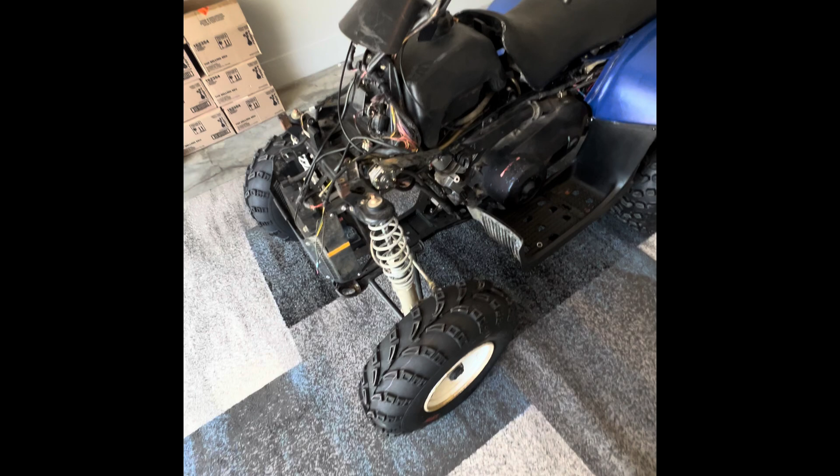One of my old good friends from a Honda dealership. I worked with him for a long time. He was our parts guy. He had this machine. He's been trying to fix it. He told me that he doesn't think it has spark, or it's an intermittent spark issue. I know it's not a real common machine anymore. It was a really common machine, but I know there's not a whole lot of them left out there because it's older and most of them are probably in the junkyard. But the same basic steps that we take here can be used on many things.

First of all, I'm rocking some Bill Murray. His new album drops later today. Pretty pumped about that. So in honor of him and cranking the hog, we're gonna rock that while we work on this.

First thing I'm gonna do, hook up a battery maintainer. I actually personally really enjoy electrical issues. I know a lot of people hate them, absolutely despise them, but it's one of my favorite things. As you can see, the battery is showing that it's charging, but I highly doubt we get anything out of it. I might get the voltage meter and take a reading on it just to see what it's saying.

All right, I'm just using a cheap voltmeter, nothing fancy here. Disconnected the battery charger, hooked up to the battery, and you can see we're showing 12.25 DC volts, which is not great. That's not gonna be enough to start anything. We should be up around 12.8-ish. I'm gonna go ahead and hook the battery charger back up to it and let it do its thing. With the battery maintainer hooked up, checking the voltage, you can see it's rising. It is charging right now.

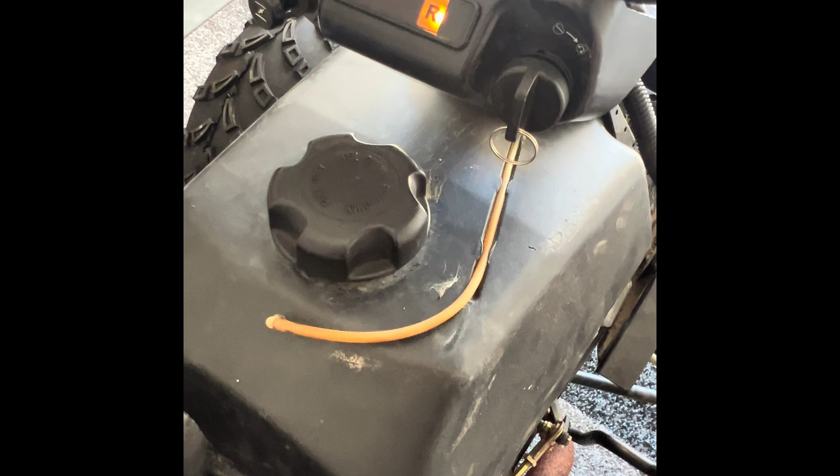One thing I'm noticing right off the bat, we have no dash lights in neutral. The indicator shows up for reverse, and then kind of partially in between reverse and neutral. Not that's neutral there, kind of partially in between, you get a neutral light. That could be some of our problems. The gear selection switch may not be letting it spark because it doesn't think we're in neutral.

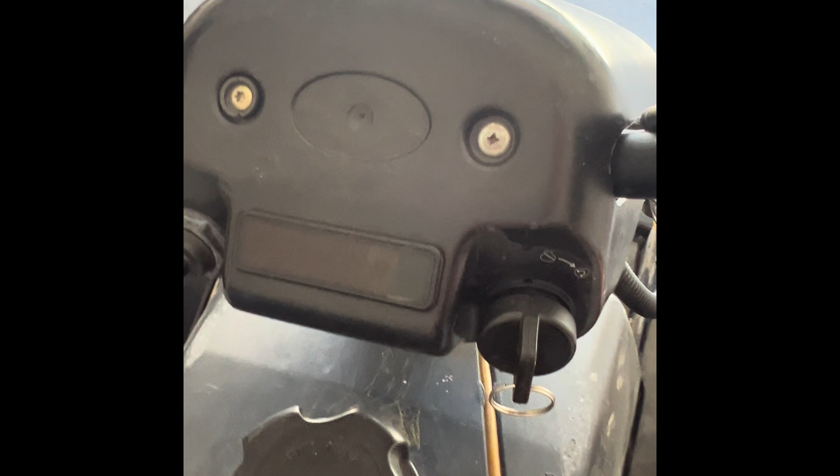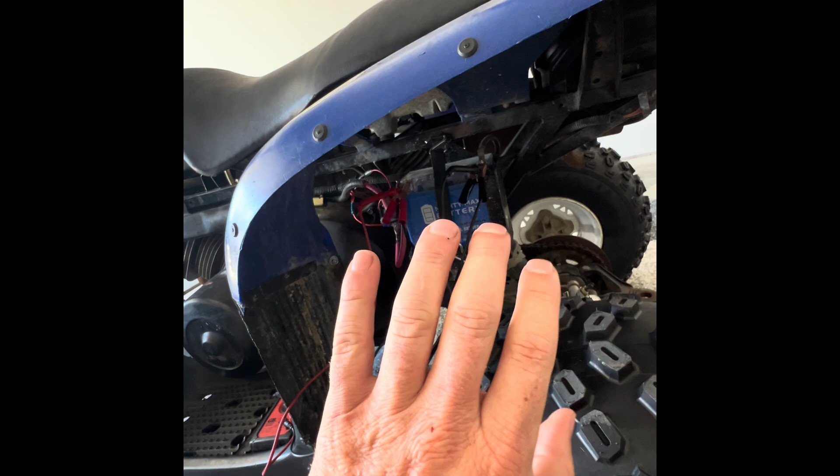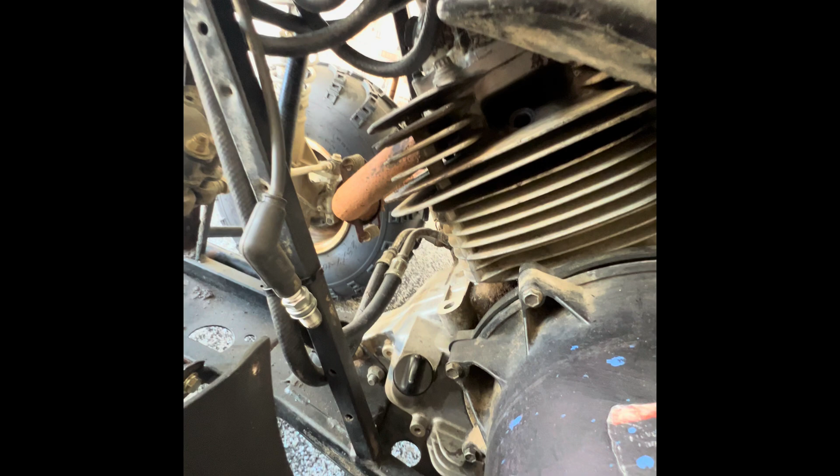Usually with electrical problems, the best thing to do would be start at the source, which would be the battery in this case, and then you trace everything towards your issue. In this case would be the spark plug. Since we have no spark, looking at the plug here, it looks a little bit black, running a little bit rich, which looks like they've replaced the carburetor. So none of that matters right now. We just need to make sure we have spark.

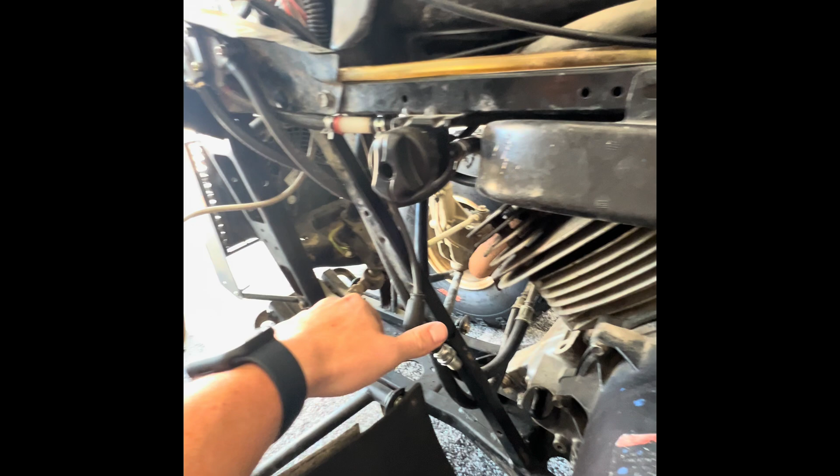And I know I just said I usually start at the source and work towards this, but I'm actually going to do that completely ass backwards today. Since he said there was a spark issue, I'm going to go ahead and test spark, just to verify if we do have a spark issue or not, to make sure we are chasing the right problem. To do that, you can take your spark plug out, keep it connected. You want to ground it on the engine, make sure it has a good ground to metal there. It grounds through the plug. We'll go ahead and turn the key on, crank it over, and see if we have any spark whatsoever.

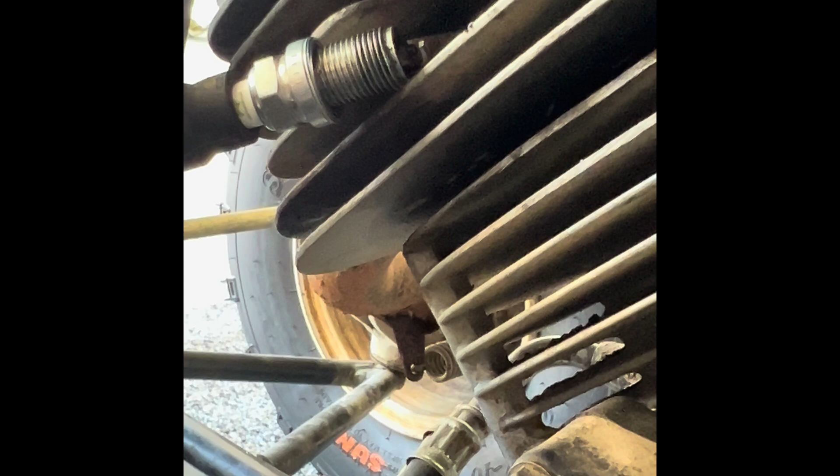Try to zoom in here and give you a better look. There's absolutely zero spark. Now that we can confirm there is no spark, since I noticed the gear selector was not indicating neutral in the correct position, I'm going to try to get that light to come on and hold the selector in that position while I'm cranking this and see if we get any kind of spark. Okay, I've got it to where it's showing that it's in neutral. Let's see what happens.

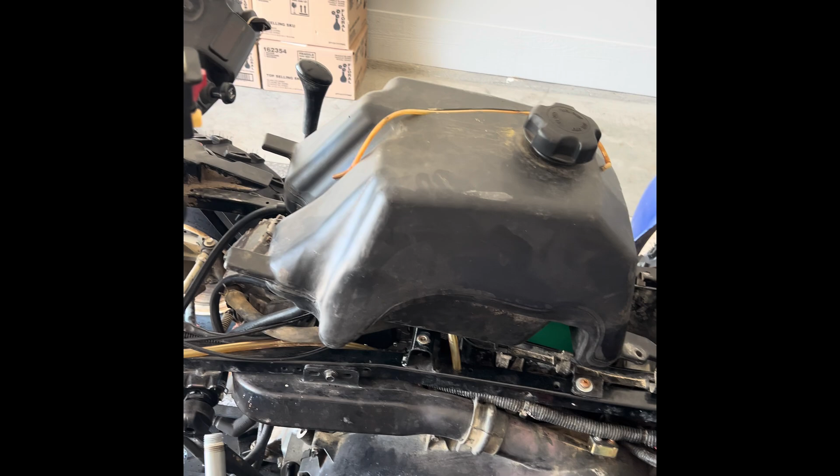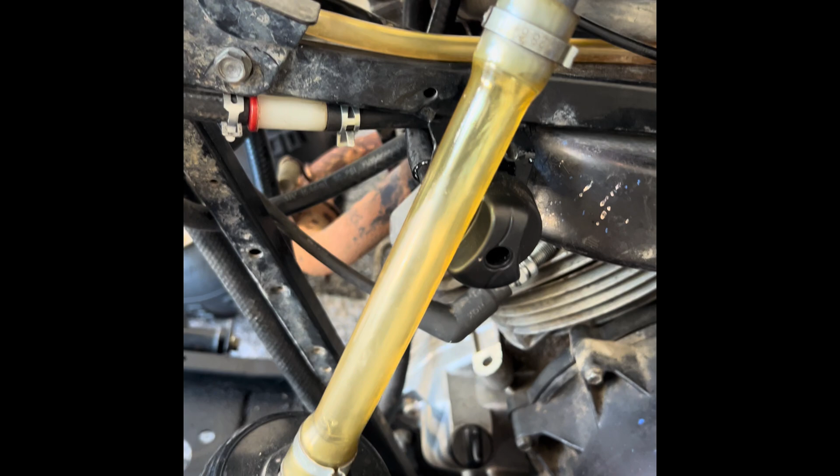It's got good engine oil, and I do know because I picked it up, the seat was off. It has a brand new air filter in it. I went ahead and took the seat and the airbox cover off. I'm going to remove the fuel tank, and it is full of fuel. So I'm just going to pull off one of the fuel lines and let it drain down. As you can see, I've got the fuel line off and the fuel is draining down into this fuel can.

I also managed to soak my iWatch, Apple Watch, whatever they call these things nowadays, in fuel, so that's cool.

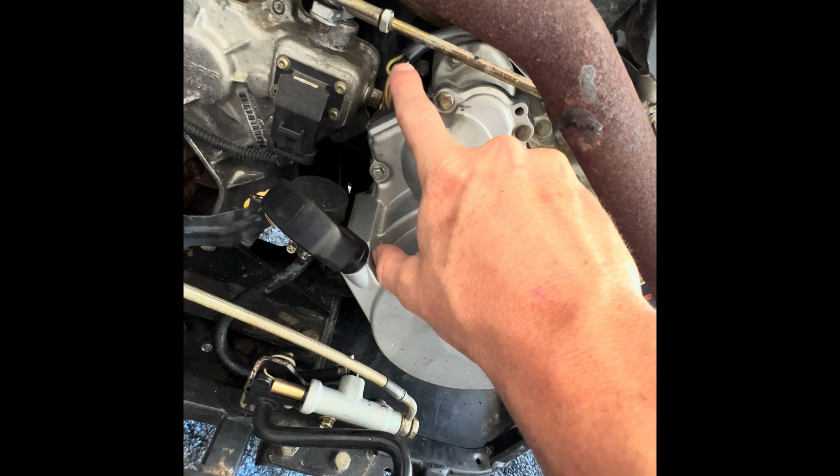Okay, we got the fuel drained and the tank out of the way so you guys can see a lot better what's going on down in here. You can see the wires for the stator coming out right here. They'll be coming out of the engine case, over the starter, up to the opposite side of the machine. They come out right here. You can see it splits.

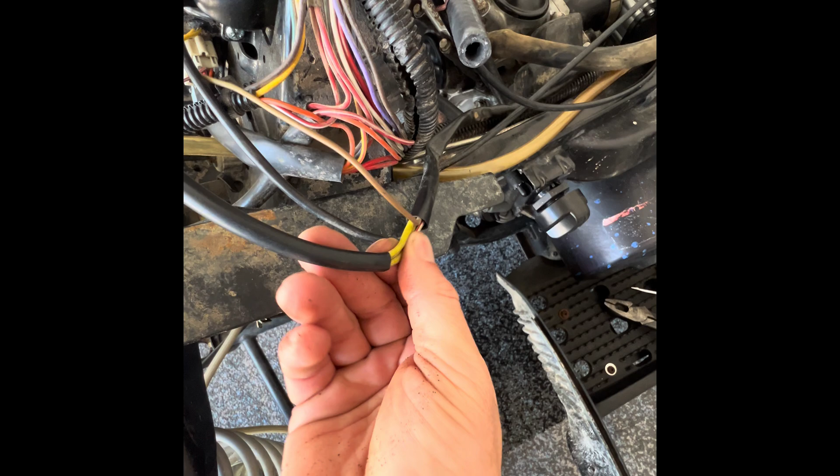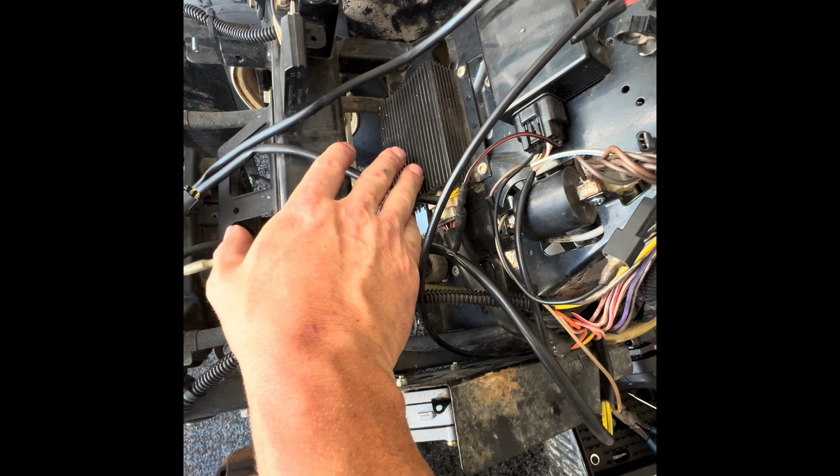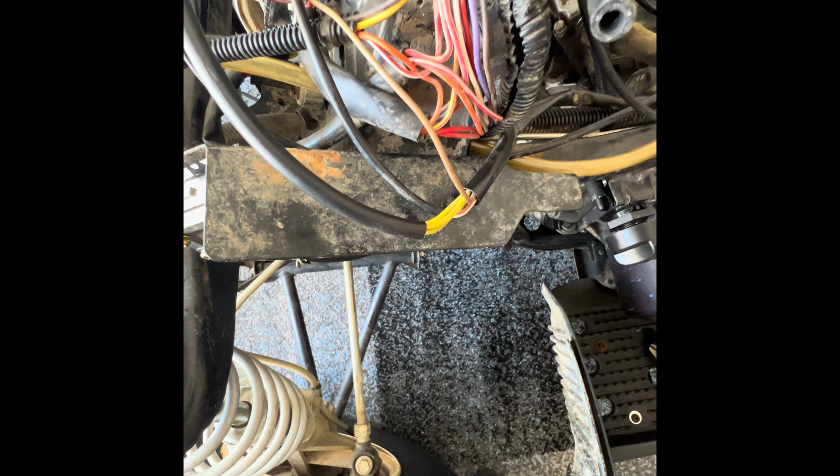There's 3 yellow wires. The 3 yellow wires control your AC charging off of the stator. So those generally will go into your regulator rectifier, which converts the voltage to DC from AC, and regulates it to keep it from overcharging. We're not real worried about those, but I am going to do an ohm reading on those just to verify, because if the magnets come loose on the flywheel and they hit the stator, it could show some shorts to ground or something through there. That will help us verify that that has happened.

But today we're going to be more focused on this white and white with red wire that come from the trigger coil or the pulse coil, exciter coil. They call it many things, but it is actually what sends the signal for spark to the CDI. We don't want to take the engine cover off and pull all that apart yet. We're going to try and verify the issue here first, in case it is okay and there's an issue with either ground or a bad ignition coil or CDI or a connection somewhere. We want to verify the problem, not replace parts.

I've disconnected the yellow wires coming from the stator. These are your AC cables that control charging. The first thing I'm going to do is check for continuity to ground. To do that, using my voltmeter, I have grounded the black wire to the engine. You put it on the beep setting on the meter. I'm going to check each one of these legs for continuity to ground. That would tell me that it is shorted to ground through the stator. Checking each of these, listening for a beep. And it sounds like we're good as far as being shorted to ground.

Now that we've done that, I'm going to get an ohm reading. So I set my meter to the ohm setting, and we're just going to go across each one of these legs. Looks like we've leveled out at 0.6 ohms. Check the next leg. Looks like it's right around 0.6 ohms too. Check across the other two. Looks like it's leveling out around 0.62, which sounds okay. I haven't checked the manual to see what the reading should be, but that is probably okay considering they're all around the same parameters.

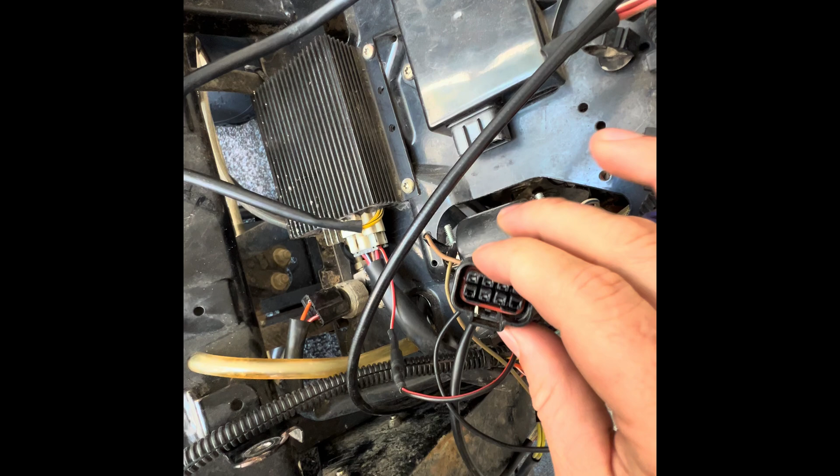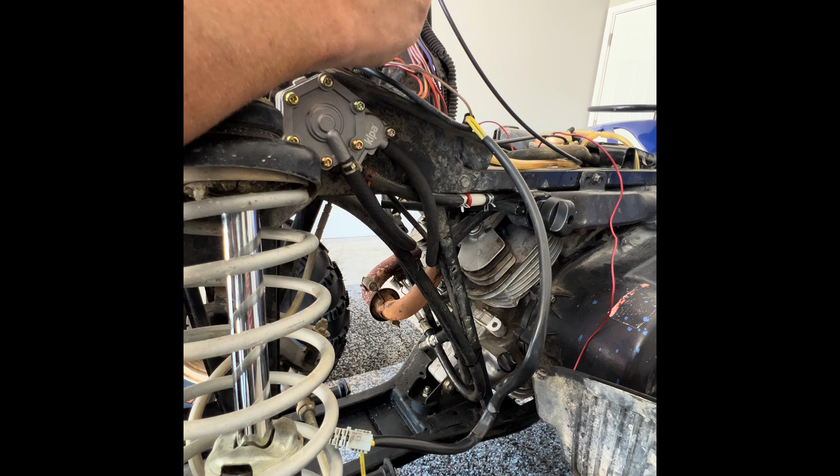Next, I'm going to do basically the same thing for the white with red and white wire going into the CDI off of the exciter coil, pulse coil, trigger coil, whatever you want to call it, that sends a signal to the CDI from the flywheel for spark, to see if they have a short to ground first. Okay, I'm going to check both of these wires from the trigger coil for continuity to ground, which will tell us if there's a short directly to ground. I'm just going to go straight to this common ground on the frame. You can see right here where all the common grounds go.

Listening for a beep. We have no beeps. There's no continuity to ground on that one. Go to the next one. No beeps. That's a good sign.

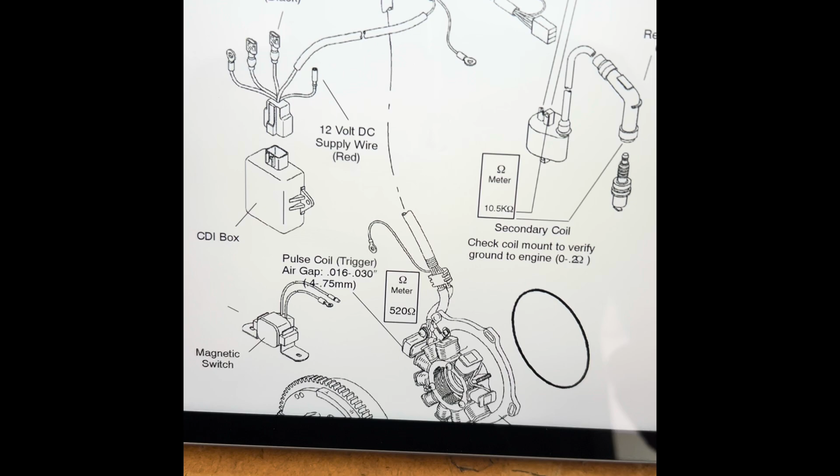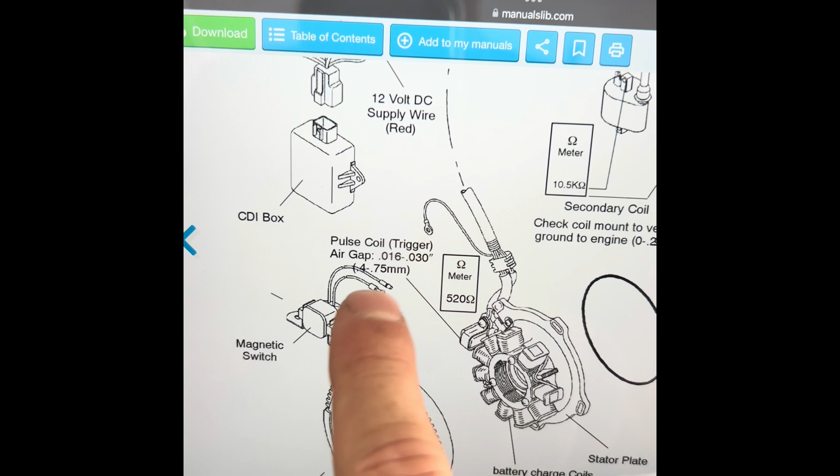So I pulled up a diagram here. You can find it on page 10.9 in the service manual, and it gives you all the ohm readings for the ignition system. We're not really going to worry about the yellow wires that were all at 0.6 ohms. I think that's good, and that's on the charging side anyways. I didn't see any shorts to ground. This is more what I'm concerned with, which would be the pulse coil, trigger coil. Like I said, they call it a million things. But you can see there's supposed to be an air gap of 16 thousandths to 30 thousandths.

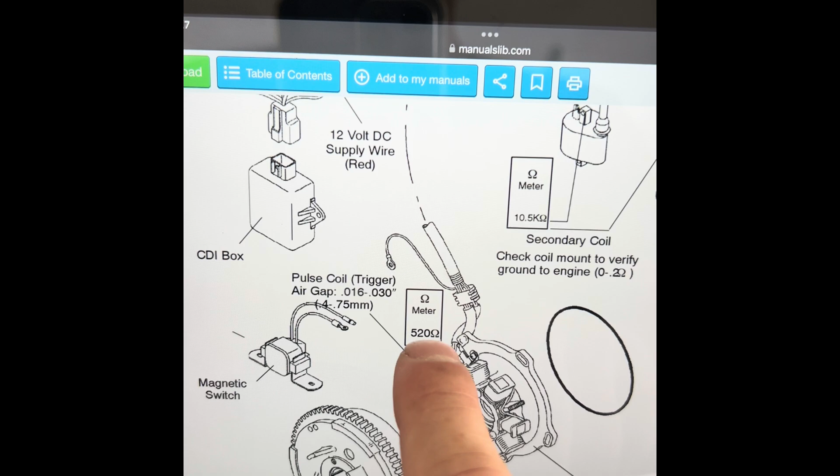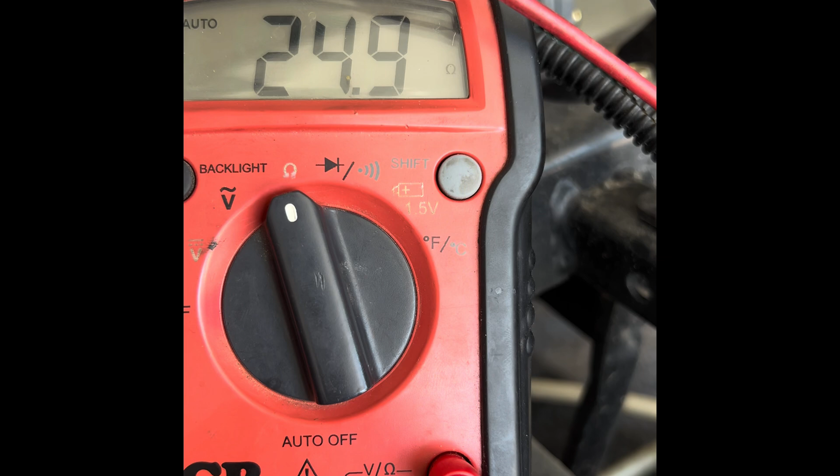We don't know what that is because we don't have it off there yet, but we can check that later. Right now, we need to check. There should be 520 ohms in between these two connectors, and we're going to test that right now and see what we get. Okay, so we're testing the white with red and white wires at the CDI connection that are the two wires coming from the trigger coil by the flywheel. That reading was supposed to be 520 ohms, and right now we're getting 24.9, which is obviously not within spec.

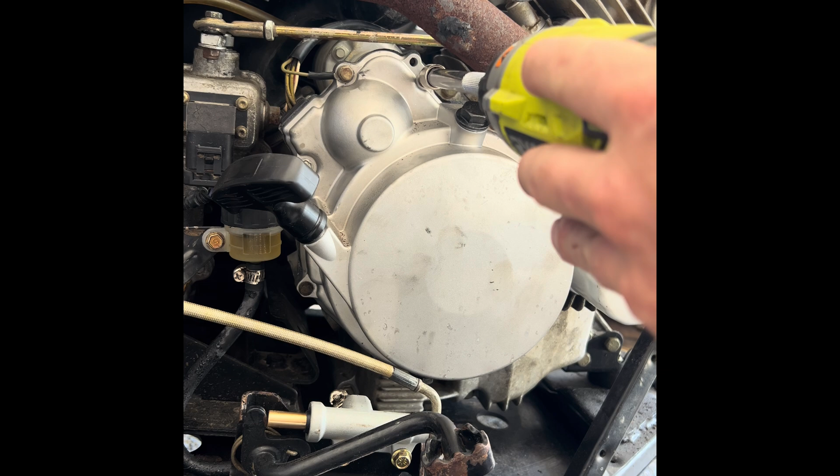All right, we're going to go ahead and pull this stator cover off. There is a gasket on there. This helps keep water out. There will be no oil behind this, or there shouldn't be unless you have a bad crank seal.

I'm not used to working with a camera, so sorry if you can't see shit.

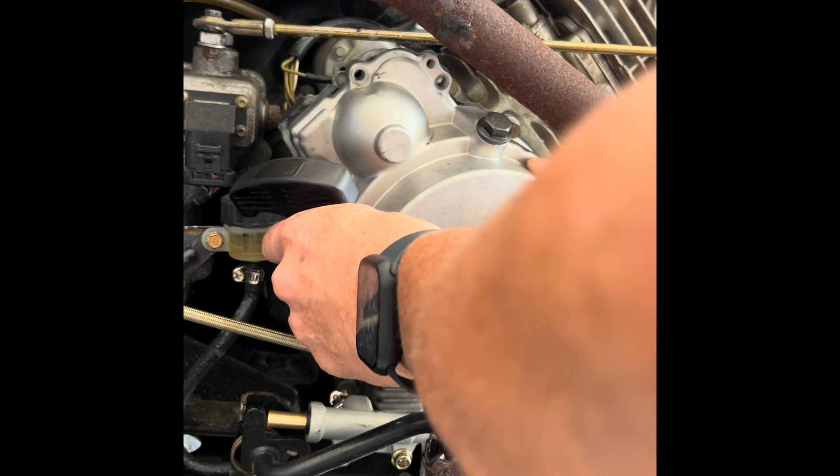Pay attention when you're taking this off. There is a ground wire here that goes to the ignition coil. I'm gonna make sure and hook that back up. Also, your starter Bendix, there's a good chance it could come out with this.

If you can hear me breathing in the camera like a pug, it's like that Shane Gillis joke.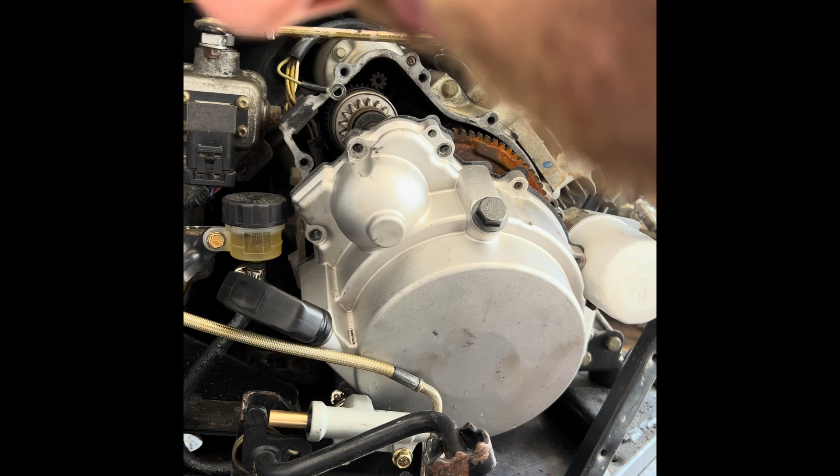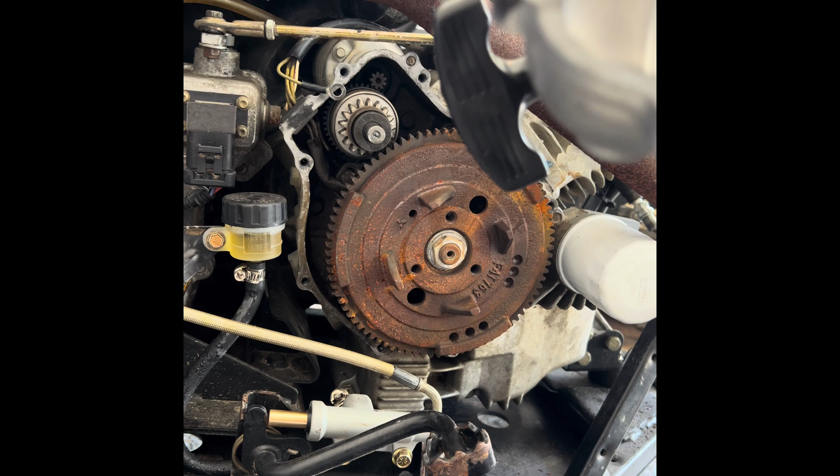You can see, oh boy. You can see the flywheel is all rusted. That's from water getting in there, moisture. That's kind of typical of Polaris. Trying to turn this over so I can see. Yeah, that's what I thought. That'll cause some issues.

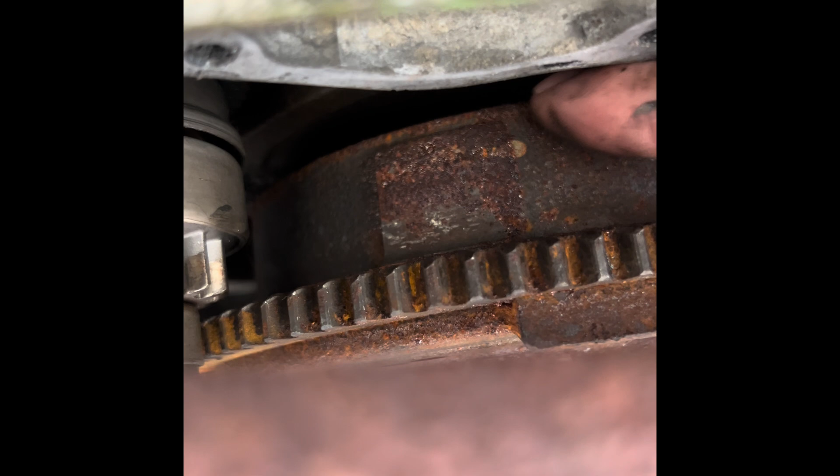So if you see this bump right here, that's what the trigger coil picks up off of, and you see how rusted it is, and it looks like it's made contact with the trigger coil. You can see the scuffs and scratch marks. That's not great. It's not what you want to see. It also looks like that side over here is worn down. That's no bueno. Let's try and pull the flywheel off here.

Also, if you look at the end of the crankshaft there, the bare metal where it's mushroomed a little bit, it looks like somebody has had this off of here recently. 22 millimeter will work on this nut. You want to put this nut back on before you hook your flywheel puller up to this flywheel.

There is a chance, especially with Polaris with the rusty ass flywheels, when you tighten up that flywheel puller, you can actually mushroom this out into the crankshaft, and that will make your threads to where you can't get a nut on. So if you leave the nut just on there, go ahead and pull your flywheel off, and then you can take the nut off, and that'll kind of fix your threads if they mushroom at all.

Alright, so I do not have a flywheel puller to work with this specific flywheel, so I'm going to run up to O'Reilly's and get, actually, hold on. Yeah, so I was going to try using a two-fingered puller and hook them in here, but I don't like that because the stator is behind there and I don't want to take any chance at hitting the stator. So I'm just going to go get a steering wheel puller from O'Reilly's, and hopefully it will line up to where I can pull it off with that. BRB. Alright, so I found a puller.

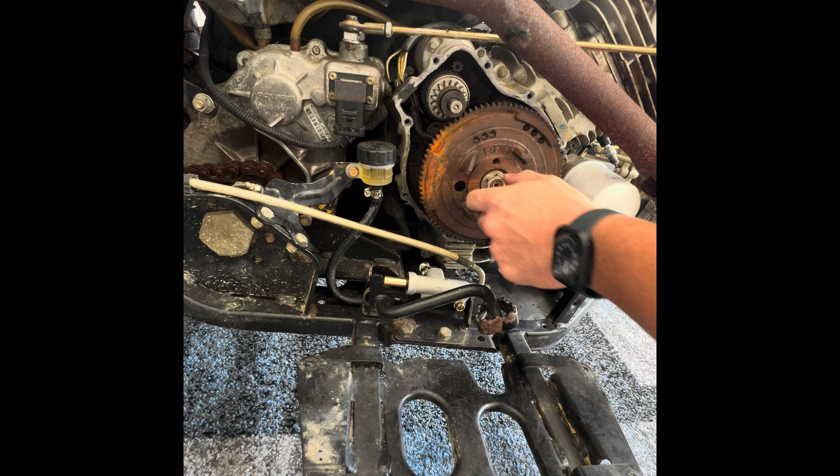You can see it boogers that up just a little bit, but the nut comes off nice, so the threads are fine. Let's pull this off and see what we're working with here. Well, not great things. You can see in here, this does have the updated flywheel to where this is sealed, so the magnets are not just free floating in here. There's a little bit of shavings in here, and you can see where the flywheel has been rubbing on the stator.

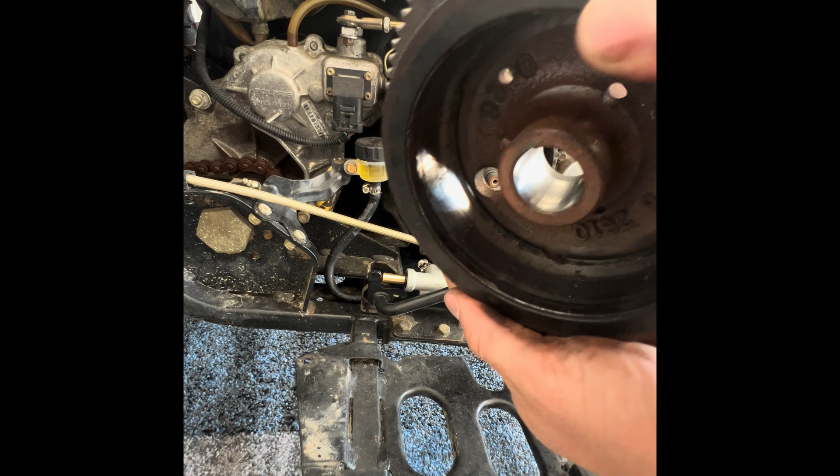I don't feel any play in the crank bearings. It's very strange. I don't know if you can see that in the picture, but you can see where it's been rubbing, and there's some metal flakes in there. That's not a good sign of things to come, but it's all fixable.

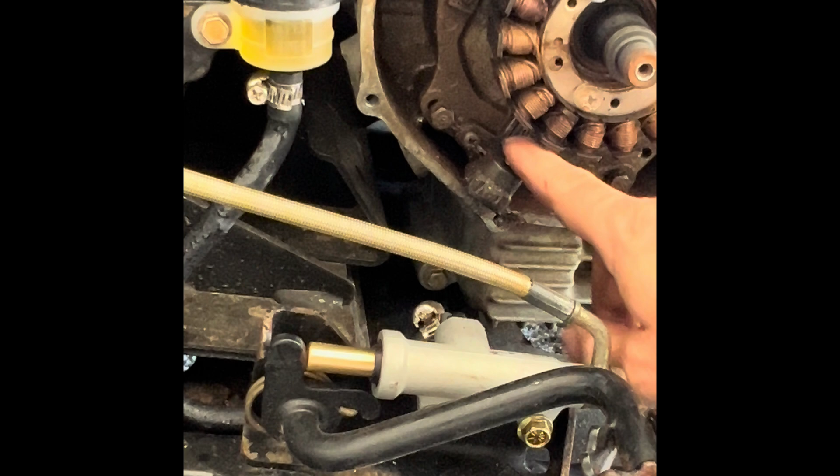This is the exciter coil, trigger coil, pulse coil, and there's a lot of stuff behind that, including chunks of something. Sorry, I had to get some rags.

Just trying to wipe that off a little bit so I can see what I'm working with. I'm gonna go ahead and pull the stator out of there. The crank bearing feels fine. The stator is not moving, so I don't know why it would be rubbing unless there was just so much buildup, dirt, grime, water, rust, all that stuff in between this and the flywheel, and that's what was actually rubbing, not the actual stator itself, because it doesn't appear to be damaged. But I'm going to take it all off there and inspect it.

Whenever you see Phillips head bolts inside of an engine, especially when they're rusty like this, don't even fuck around with a screwdriver. Just go ahead and grab an impact driver. See how much easier that was? And honestly, may have broke off. That'd be real sweet. One's already pre-fucked. Love that.

Well, fuck. Try the old chisel trick first to get this bolt to break free. Put a little groove in it like that. Try not to slip and hit the stator. And I think it broke loose there. Yep.

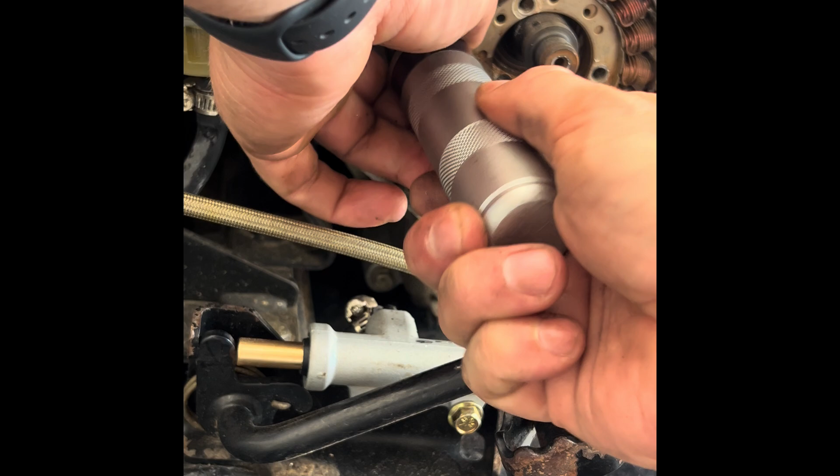Make sure to pay attention to the orientation that plate comes off. You put it in backwards, it will hit the flywheel too. Stator's out of the way. Looks nice and grimy. Not what you want. Crank seal doesn't appear to be leaking, but there is an O-ring behind this cover here that can leak. Like I said though, we're focusing on the trigger coil here, and I'd like to find out where those chunks of metal came from.

Well, guys, I don't know if you can see that or not, but the trigger coil was loose, and that probably means that the gap closed enough that it was rubbing the flywheel, and that's why we have the marks that we had. Uh-oh. It's a big chunk of metal right there. The fuck did that come off?

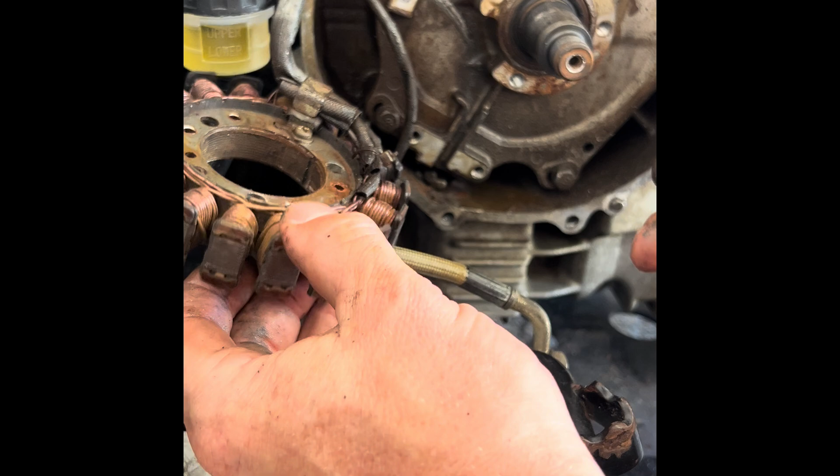All the gears are on the Bendix. Damn, there's all kinds of metal in here. Surely somebody did not replace a flywheel and stator on this and leave chunks of metal laying in here. There's literally nothing it could have came from. What the f... So I've already pulled out this big chunk of metal, which doesn't really look recognizable to me. And then there's another chunk right here. See if we got any other cool stuff down in here.

Alright, so I just want to show you guys something. The chunks of metal, I still don't know where they came from. I'll do some digging later to find that out. But you guys see anything wrong with the trigger coil? It got hit by the flywheel. You can see a crack right along here. Also, it's dislodged right here, and the wires are all ripped out of it. This trigger coil is junk.

Where did the metal chunks come from, though? Still on the search for that. But I'll go ahead. That's all junk. So, fuck all of that. Anybody have any guesses where those chunks of metal came from at all? These two big ass chunks. Anyways, the flywheel. I mean, there's nowhere that they could have come off of it. Yes, it's a little bit rubbed up inside here, but it's probably fine.

You can see where the trigger coil had been hitting right here for a long time, and you can see the marks where it finally wiped it out. But there's really no indications of where those metal chunks came from off of the flywheel. I don't feel where the cases have broken off anywhere. I guess I'm gonna end up pulling this cover off. I didn't want to because I don't want to take a chance at damaging the O-ring, and I didn't want to drain the engine oil. But probably need to, just to make sure that whatever's broken isn't hidden by this. So I'm just gonna pull this cover off just to feel better, check everything out.

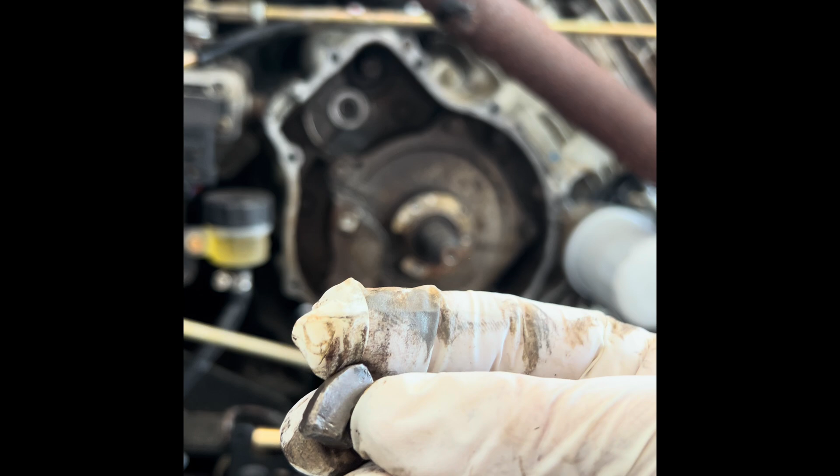To me, it looks like something that was left over in the past. I think somebody's been in there. Obviously, we saw the flywheel had been pulled off before, and it has a new pull start housing. So somebody has done some work in there before. It's probably grenaded before, and obviously they just didn't get everything out of it. And that's probably why one of those metal pieces, since the flywheel is magnetic, probably stuck to the flywheel, and that's what wiped out the trigger coil. Also, one of the bolts on the trigger coil was already loose, so it could have just, you know, moved itself and hit the flywheel.

But regardless, I'm gonna try and pull that cover off. I hope no oil runs out. Hopefully the oil level is low enough that it doesn't run out of there. But I've also got plan B down here in case that does happen. We're gonna fuck around and find out.

Hell yeah. Also, somebody's leg skin is right here on the exhaust. No, it's from the fender, but could very easily be leg skin. Sorry, I dropped some bolts, so I'm trying to clean them up. One fell in the oil pan. Why wouldn't it, you know?

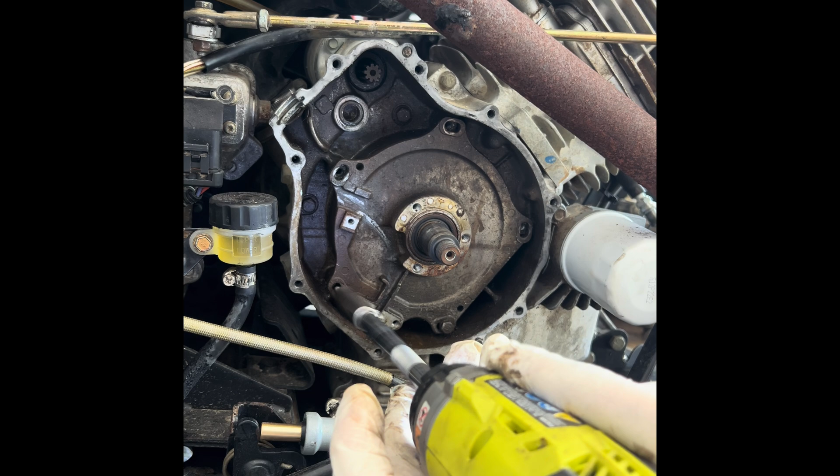Now, let's hope that a bunch of oil doesn't come gushing out of this son of a bitch. Not a ton. Hell yeah. We can work with that, brother. I don't see anything broken, guys. I'm gonna be honest with you here. I think those chunks were from either a pull starter that came apart in the past or that it had a previous flywheel incident.

See, everything on here looks okay. There's no broken pieces. I'll probably go ahead and replace this crank seal while we're in there. See the cam chain here, pretty tight. That's good. The oil honestly looks like it's been changed recently, so that's also good. I don't see any missing chunks of the casting of the cases.

Need to go through here and run my magnet in there, make sure to get anything out of there so we don't have this issue again. Might as well check that all those are snug while we're here. One of those came out in there, that'd be bad news bears. Tight. Tight. So we're gonna order a stator and a trigger coil. Ooh, forgot about this little problem right here.

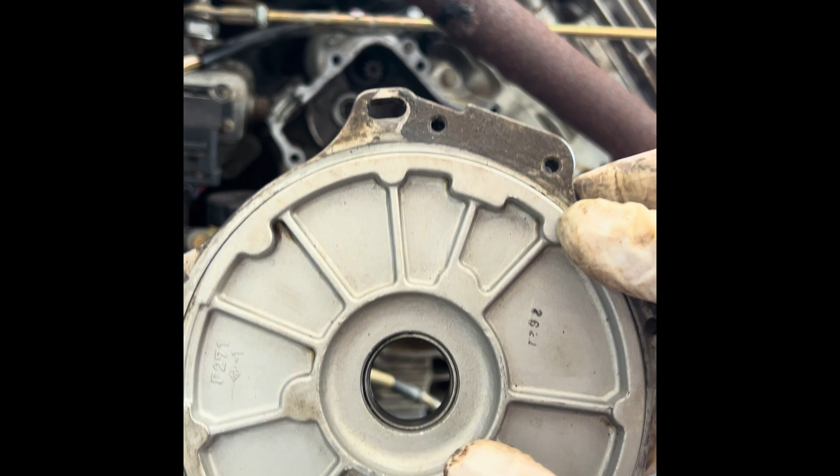Inside this cover, there's also a bushing right here. It's a lot like a bushing on a dirt bike fork, if you've ever been into a fork on one of those. You just want to make sure that's in good condition too. The crankshaft does ride in that and it looks like it's okay. Make sure the Woodruff key is still there and in good condition as well. When you slide that on, make sure that the Woodruff key does not cut the seal. Just rock it back and forth a little bit, you should be able to feel the O-ring lock into place like that.

This is also your ignition timing plate, because if you turn this, it's going to move your pickup coil to a different part of the rotation, which would change the ignition timing. So I'm not 100% sure on this one where the indicator is, but there will be a timing mark in here to line that up with before you tighten this up, and I'm going to do that when I figure out what the fuck it is. It's been so long since I've worked on a Polaris ATV, I don't even remember if I ever knew. But somewhere in here there will be an indicator to line up with to get the timing correct.

So I'm gonna wait to tighten that down. I'm gonna look that up in the manual real quick. Just to go over with you guys a little bit of what we tested and found here to make it make a little more sense.

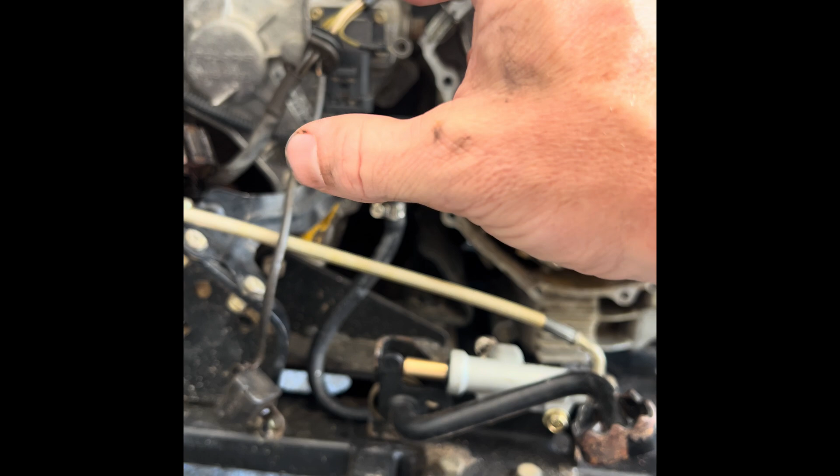I tested the 3 wires from the stator, you remember, and they tested okay. They all had 6 ohms. There was no short to ground or anything like that. And judging by what we're seeing here, that checks out. The stator looks okay. It's a little rough from all the rust and stuff, dirt and stuff in here, but as far as charging, what the stator does, it was working for the most part. And that's why everything tested okay.

When we moved on to the white with red and the white wire, we got a high resistance, and that is because this is damaged and the wires aren't even connecting, so there was a high resistance. That's why you should do those tests before you just start digging into stuff and replacing parts, because you don't really learn what the exact problem was when you just replace parts instead of doing the test. This is like $13. So learn how to use one of these properly, and you can save yourself a lot of time, a lot of money, a lot of headache for sure.

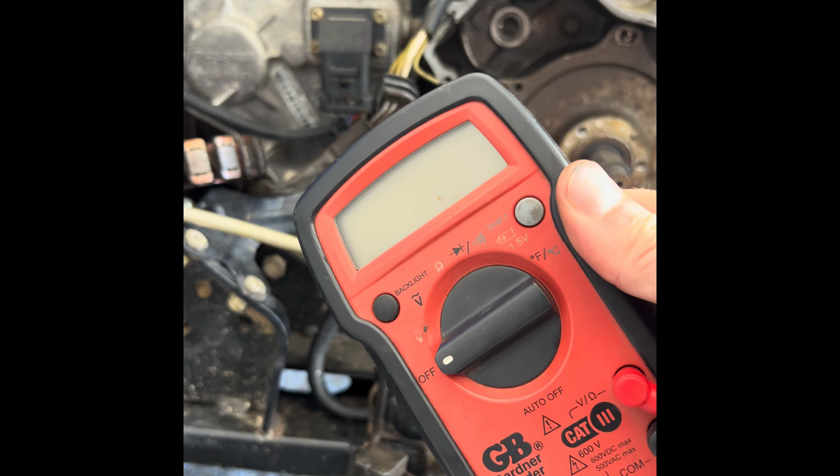But I just messaged the customer and told him that the stator and pickup coil are junk. They need replaced. They got hit by the flywheel, which is also, it's okay, but it has damage on where the pickup coil gets its signal from. That will affect the ignition timing as well. So I'd say this thing has been running rough for a while. Yeah, so that's where we're at with that.

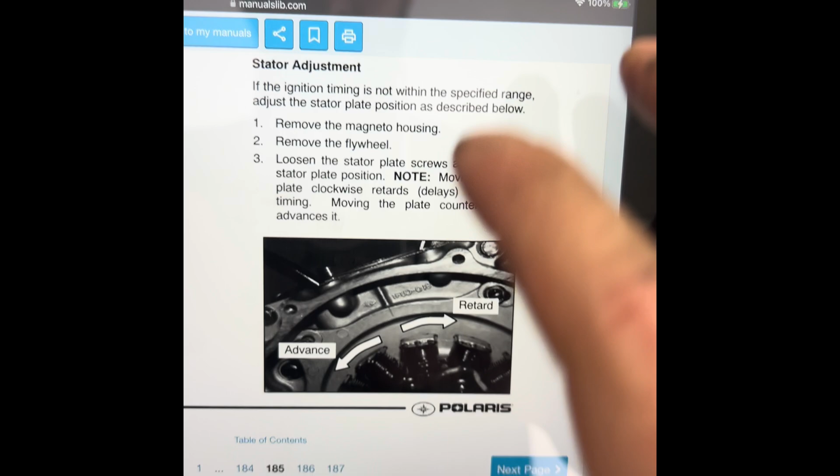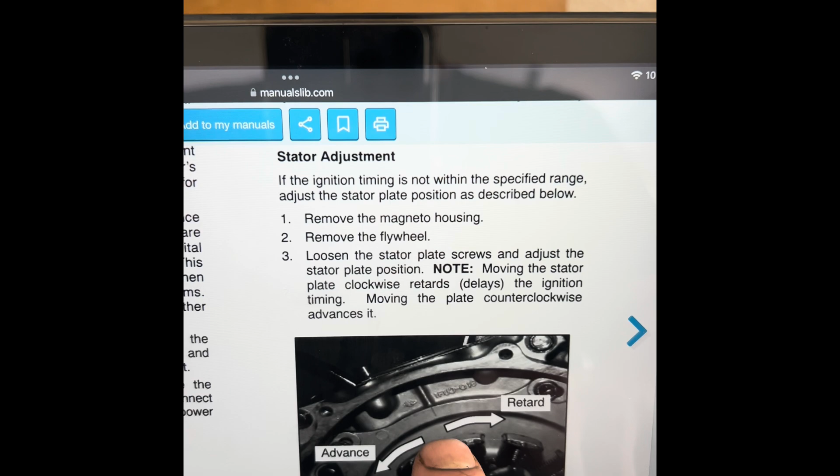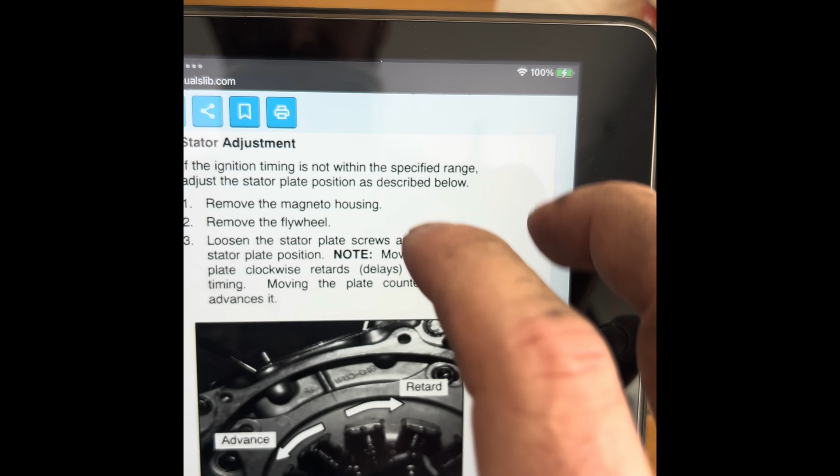Just want to show you guys in the manual what I was talking about with the ignition timing being controlled by that plate that the stator mounts to that we just pulled off. You can see right here, this is showing a picture of it. I could not find that indicator, this little line in the casting right here, because it's so covered in rust and stuff, but I'll clean it off and I'll be able to see it. But you can see here, if you turn that plate this way, you retard the timing. If you turn it this way, you advance the timing.

Obviously, we want it perfectly in line with this bridge right here. That is the indicator, and I will show that. Looking at the plate here, that mark is going to be right there. I believe you can see it now, right here. That needs to be perfectly in line with this bridge in the casting right here. So right now it's a little bit on the retarded side, kind of like myself.

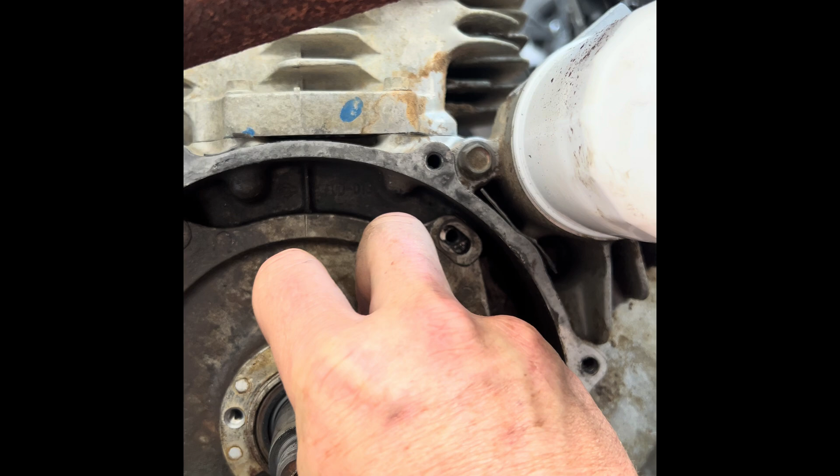To my eyes, that right there is about perfect. See what the camera sees. Maybe a little bit advanced. Give it just a little bit more. Why does it look completely different in the camera than it does with my eyes? To my eyes, it looks like it's retarded over here. To the camera, kind of looks like it's a little bit advanced. We're gonna go with my eyes, okay?

So now that we have the timing set with the plate here, we can go ahead and put our bolts back in and snug that up.

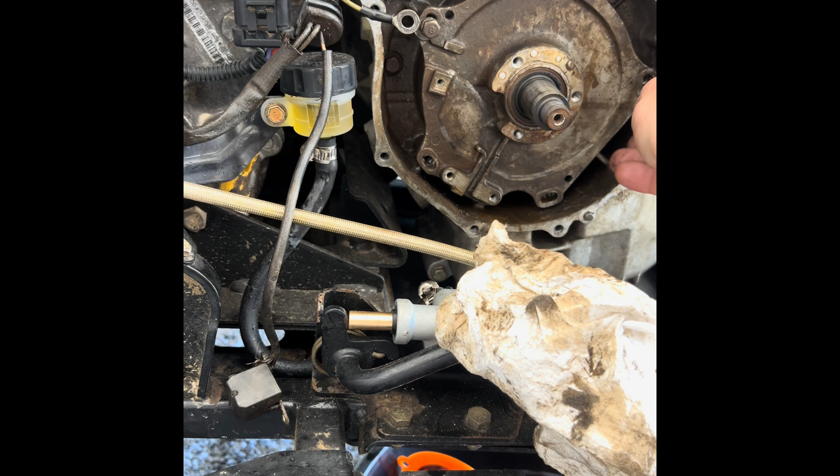Also, I'm kind of struggle fucking this, if you can't tell, as far as dropping shit, putting bolts in. It's very hard, I've found out, to work hands-on and have a camera set up to where you can catch everything. So I give a lot more respect and credit to the guys that do this on YouTube and stuff a lot. It's a lot harder than you think it would be. Even talking, like, I keep stumbling on words because I'm trying to pay attention to what I'm doing and think at the same time, which is not one of my strong suits.

So, all right, we got that plate back on there. Tighten these up with a ratchet, not an impact, because if you pull the threads out of there, you have added about 3 hours to this job. Ask me how I know.

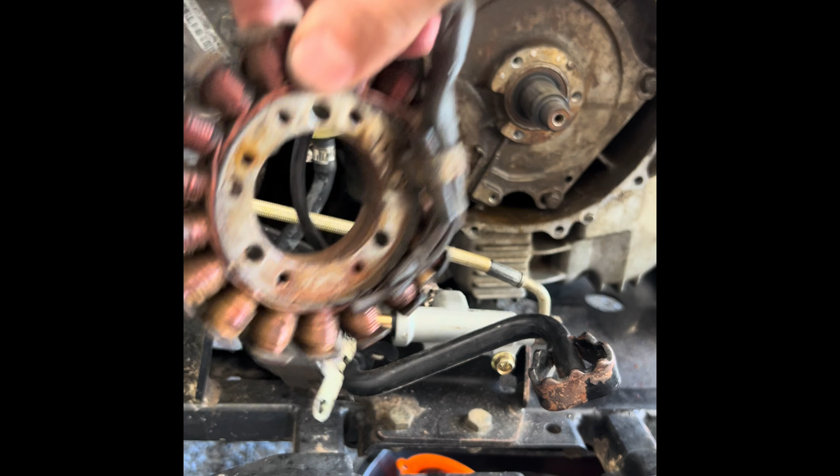All right, got all that taken care of. Really can't do anything else until we have a new stator and pickup coil as far as down here. This goes in fat side forward. It's got a washer on the end. Make sure that's on there. Just like that. You can see it engage with the starter gear there.

And then it's going to line up with this. Sorry, it's going to line up with this on this side, so it's a little funky. So just make sure you get that all lined up. There's some guide pins that make it a little easier. And then we'll just put a couple bolts in it just to hold it on there until we get the parts, all that good shit.

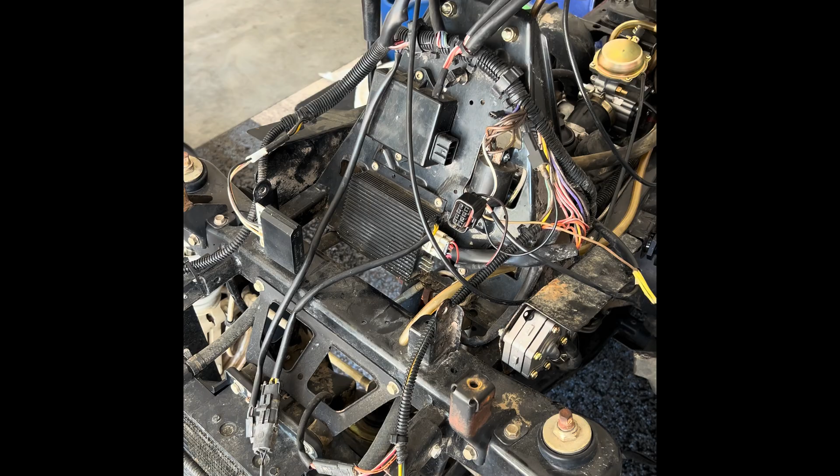I do want to go through a couple things to eliminate maybe some future problems when we get the parts. We can test a few things here without needing any of the stator stuff, just to eliminate maybe some problems that we might run into when we get the new parts and go to put everything back together.

This is, I believe, the connector that is supposed to go into the throttle housing, which will also cut spark at a low idle. So I don't know why that was unplugged. Maybe they bypassed it, but we can deal with that later. The white with red and the white wire here are the ones that signal comes from the trigger coil. And then you can see this white with blue goes into the ignition coil, and that is what's going to send power to the ignition coil.

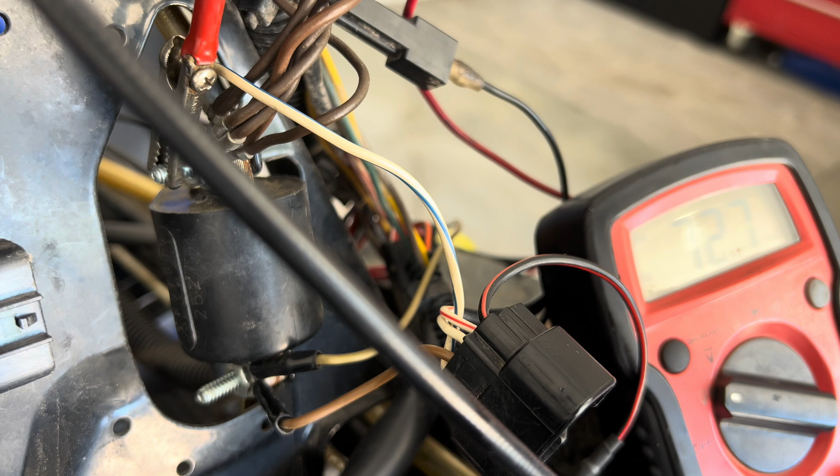What I want to verify right now, though, is when we turn the ignition switch on, that we are getting battery voltage to the CDI. I've got the ground side of my meter grounded to the common ground right here, so all I have to do is use the positive lead to test for voltage. And I believe it's the black with red wire here that should send voltage, but I'd have to look at the wiring diagram. We're just going to test it for voltage.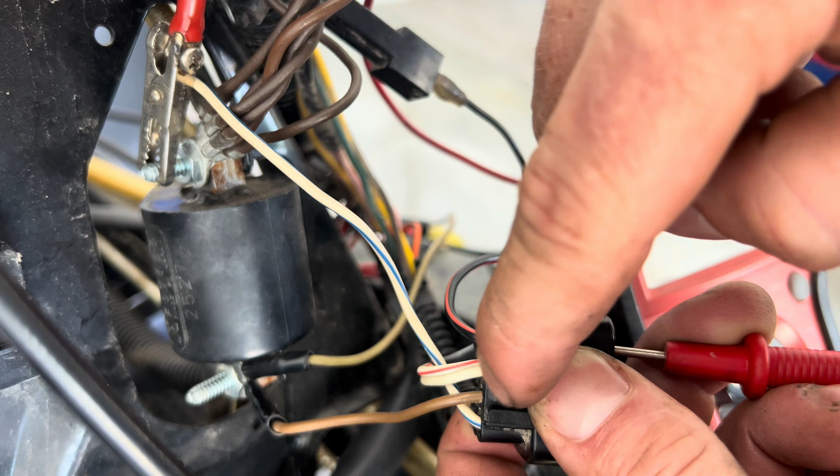Got the meter set for DC voltage. I'm going to turn the key on, and we have battery voltage, or it looks like our battery charged up nice there. So we have voltage going to the CDI. That's good. And obviously you can see we have ground for the CDI, this brown wire coming straight out to the common ground. So everything should be good there as far as voltage and ground going to the CDI.

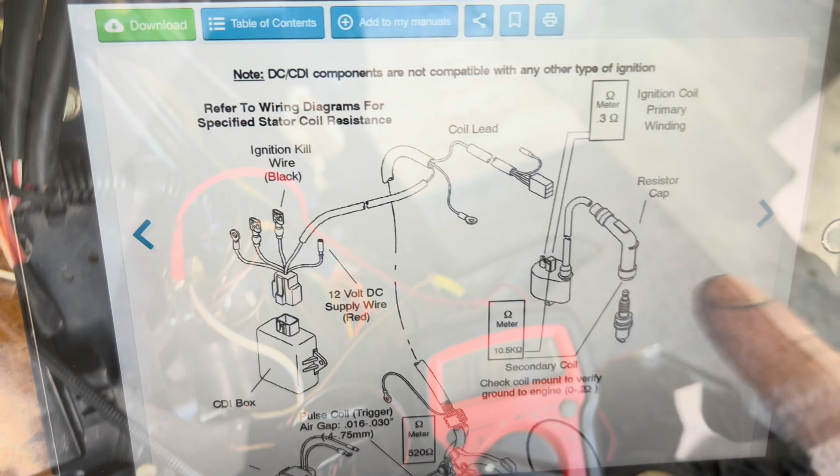With that said, really the last thing that we need to test is our ignition coil itself, all the way to the plug. So I'm gonna go ahead and take the plug out, and we'll look at the service manual and see what the ohms reading for the ignition coil is. All right, we pulled up the service manual here. You can find most service manuals online in a PDF format if you're lucky.

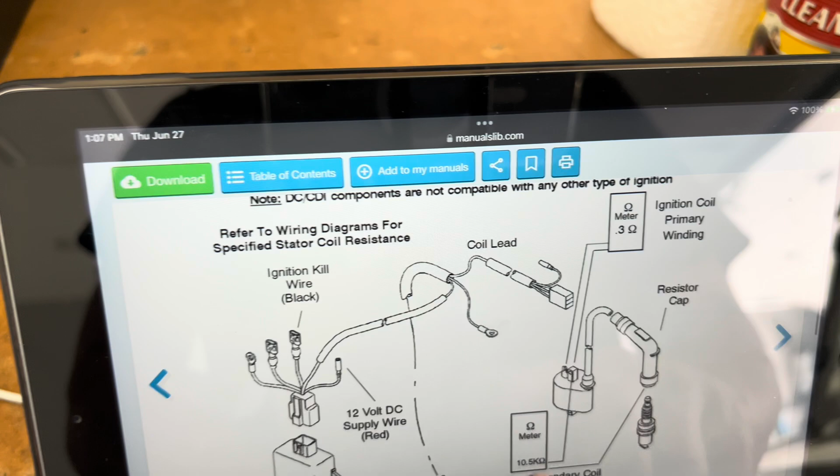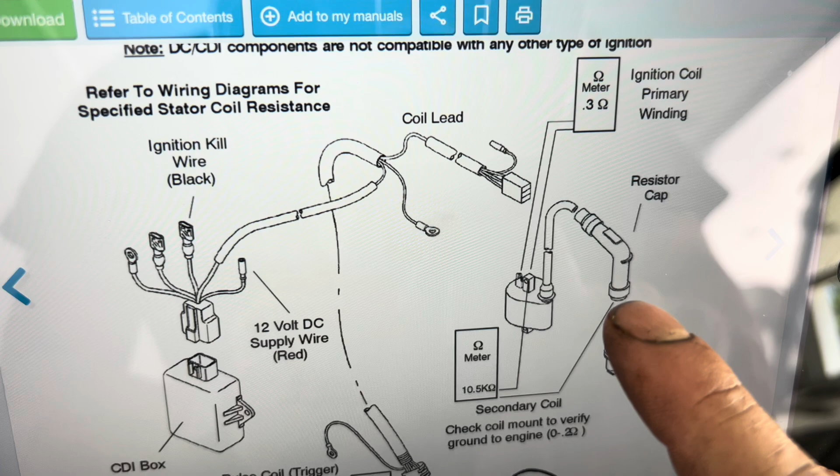Page 10.9, this shows the ignition system, and we're looking at the ignition coil right here. On the ignition coil primary winding, which is between the positive terminal that the white with blue wire was on and the ground, we should have 0.3 ohms. And then if you go from the ground to the spark plug cap on the inside, you should get 10.5. We'll go test those.

All right, I've got my meter set to ohms, and you can verify that by this little symbol here. I've got the ground side of my meter hooked directly to the ground here. Then I'm going to take the positive side to where the signal wire comes in and hold it up to that. We should get 0.3-ish ohms, and it's right around there. It's probably good.

And then we can stick our meter down into there where the spark plug would touch. I'm reading about 11K ohms, which is close enough to 10.5. It's probably fine. So we know those things are in good shape just by testing with a meter. They're a little bit off the values, but each meter can be a little different, and your connections might not be great. So that's close enough that I'm comfortable with it.

If you get an outlandish reading way off, like our pickup coil was supposed to be 520 and we had 24 ohms, obviously something's wrong. Also, this black wire that comes down from the kill switch plugs into the CDI. You can see it coming out of the connection from the CDI. We can test the kill switch by plugging one side of our meter into this, setting it on the beeper setting for continuity, and touching it to ground. So when you flip your kill switch, it should make a beep sound.

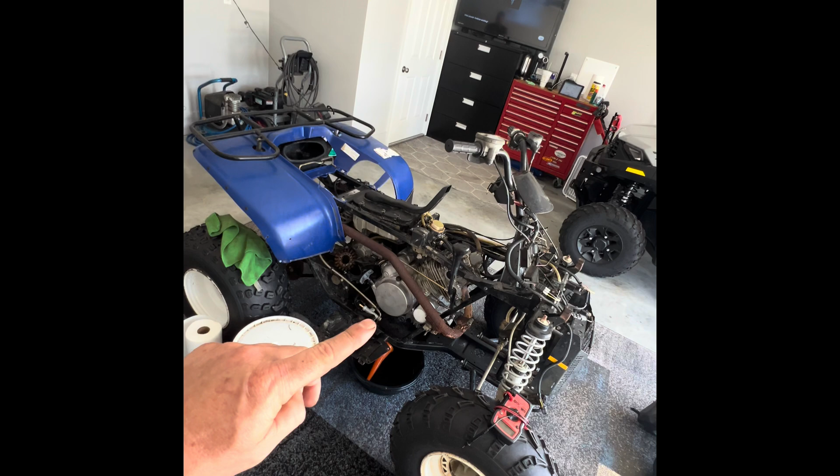All right, guys, that's about as far as we can go with this one today. As you saw, the battery did charge up, and it was enough to turn the engine over to do a few tests earlier on in the video, so that is a good thing. I'm going to leave it on the charger till it reaches a max charge. We are waiting. We've ordered a stator, pickup coil, and flywheel. I believe it needs all three of those things.

We may have been able to get away with the flywheel with cleaning it up and refinishing some surfaces, but with that one side worn off, it is going to affect the spark a little bit, I believe. So might as well just go ahead and get a used one that's in better shape or a brand new one. The chunks, we found out nothing was torn up in there, so that was probably from a previous explosion that somebody did not clean out well, because the chunks were probably hidden back in those casting galleries where you couldn't see them. So we ran a magnet in there and got all of that out.

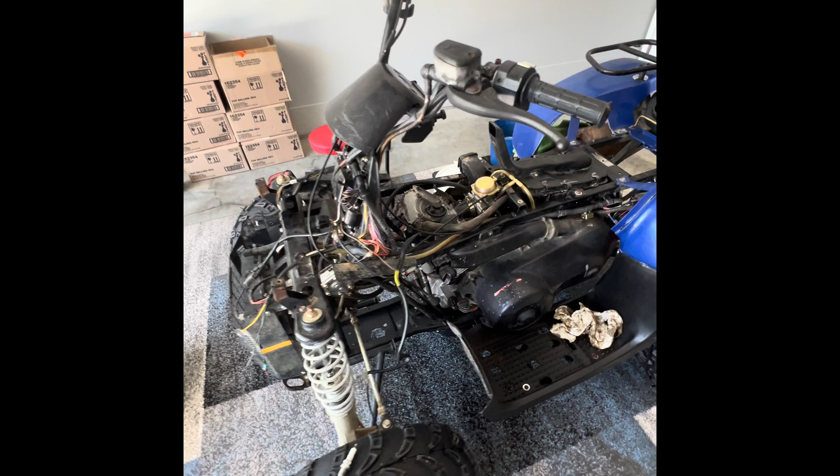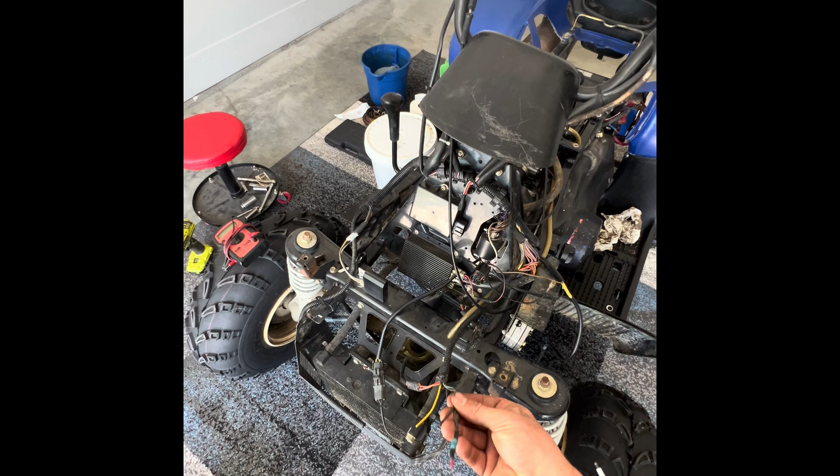We tested the ignition coil. We know that that's in good condition by doing ohms readings. What we do not know without it running is if the charging system is working correctly. And as low as the battery was, obviously this thing wasn't running though, so it may be. Once we get it running correctly, I will check the charging system. I may make a video on that. I believe this is from, I think it's the left headlight, and they used it to put an accessory on too or something, or maybe another light. I'll fix all that too when I do the final video, put all the battery stuff back on.

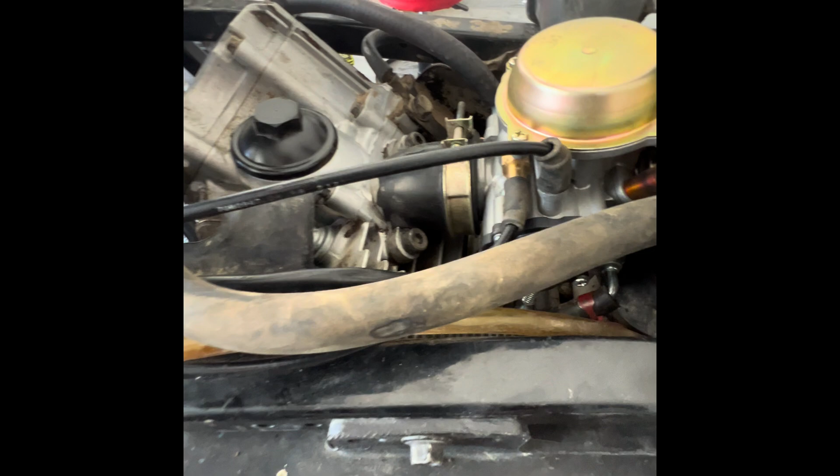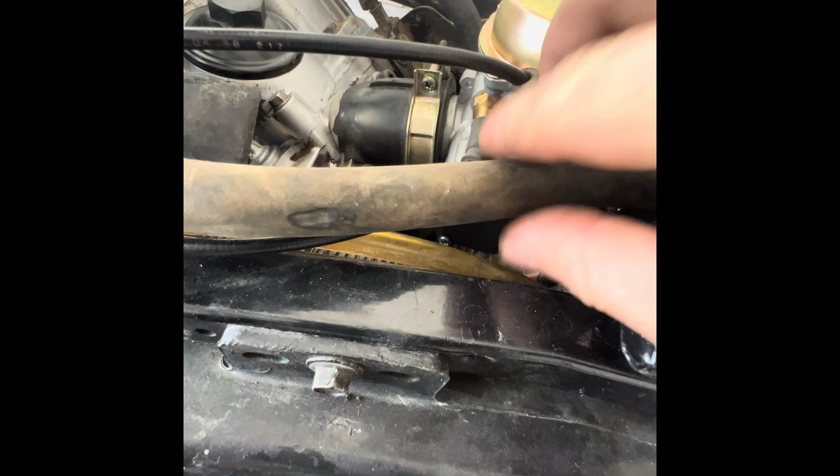I do know it has good oil in it, good gas, brand new carburetor. Not sure if that's OEM or Amazon. It looks, usually a Keihin carb or a Mikuni will have it labeled on that plastic throttle cover, I believe. Try to see if I can see an indicator on that. Looks like it's probably an Amazon carb. I don't see any Keihin or Mikuni markings. Brand new air filter. Needs oil on the pre-filter. I'll have to do that. I'll make a note of that.

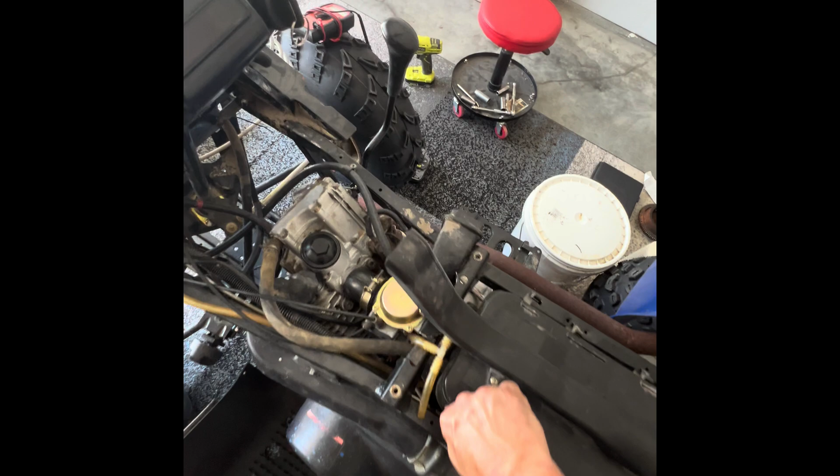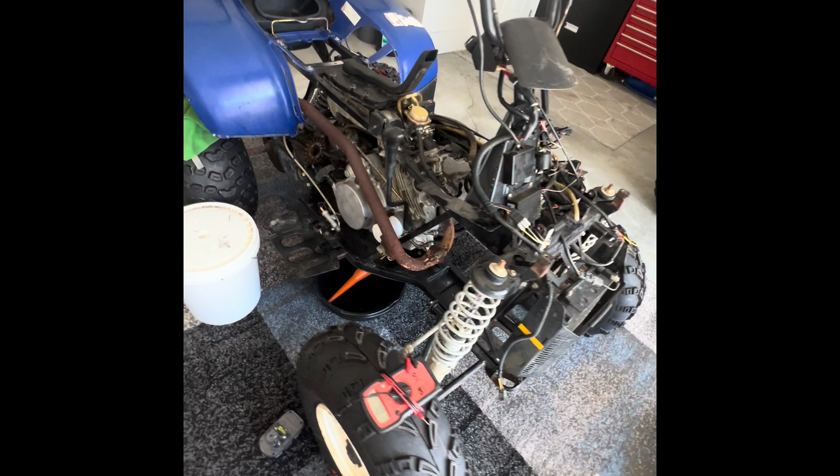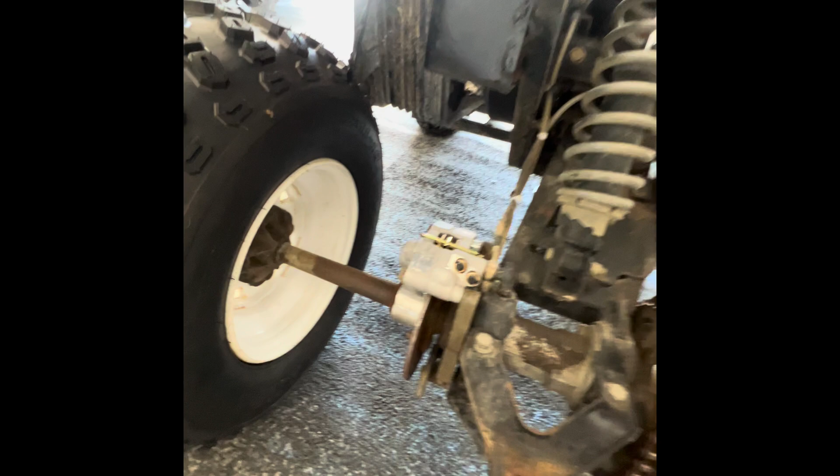Other than that, really the only thing that would keep it from going once we get everything is, I think we're going to have to adjust the gear selector a little bit to get it reading neutral when it's actually in neutral. And then maybe the valves, maybe put new tires on it. I think all the wheel bearings and stuff, yeah, it's nice and tight. It's actually in pretty good shape for as old as this thing is. Looks like it got a new rear brake caliper and pads. Make sure all the lights work and all of that.

Other than that, yeah, we just got to fix the stator, flywheel, and pickup coil. Plug all this back in. We should have spark and should have a running ATV if we have fuel. I would do a compression check, but I've got all that apart, so I don't want to do that right now. I'll wait till I get that together. Might do a compression test on it just to know what it's sitting at in its current state. I doubt it's been rebuilt. I don't like to see things like this. But like I said, I think that's as far as we can go with this one today.